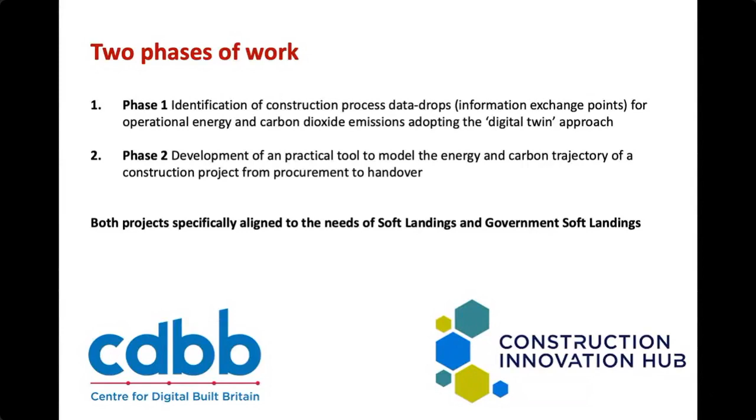We're not here to talk about phase 2, but if I get a chance at the end of this talk, I will do so. The point of this particular project is to align to the needs of soft landings generically and the central government client version, government soft landings.

I can't assume everyone listening is fully aware of what soft landings is, but there are two sentences which largely encapsulate it. I'm not going to read them out, you can read them as quickly as I can. The overall purpose is to improve the operational outcome of the building, not the construction process or the construction project team, the building, the asset.

We must remember that's what it's about. It's not about construction efficiency, design quality, or cost effectiveness and timeliness. All those things are really important, but it's about whether the building performs as intended in energy terms, in comfort terms, usability and manageability terms.

So there is what we call the soft landings virtuous circle, and this is the opposite to the business as usual vicious circle that construction gets itself into. There are now six stages to soft landings. We separated design and construction a few years ago, and that was a damn good thing that happened.

The one bit that's missing from this circle is feedback to the next project. We have to learn from experience. The whole point of soft landings is closing the loop between client expectations, design intentions, and the operational outcomes, and learning from the experience.

I might argue, and I'm sure I'll offend a few people here, that the UK construction industry is one of the very few, if not the only, major industry that persistently operates in an open feedback loop. It almost tries not to learn from experience. Some would even claim the industry's insurers drive this culture in order to reduce risk.

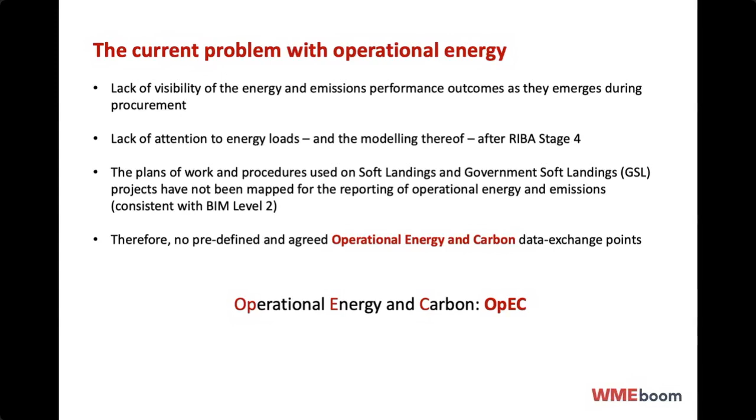Now, this diagram usefully appears both in TM61 and the RIBA Plan for Use, and what it demonstrates is that we regularly overpromise. We go below the regulatory or client target line there on the performance factor scale on the left-hand side. We often try and beat that, but when we switch the building on, we discover it's actually an energy performance gap of anywhere between 2 and 3 and sometimes more.

And there are reasons why that is. And there are no soft landings activities. So if you do actually recalibrate the model in year 1 of building operation, you're likely to find this disparity. We call this the performance gap.

It's well documented, although I will give you a demonstration of it here. This is an academy building. Doesn't matter which county it is, they're all the same.

As you can see, the as-built EPC for regulated loads only was beating the target emissions rate. The scale on the left-hand side is TER in kilograms of CO2 per square metre per year. There was no as-built EPC for unregulated loads in this particular project, but it hardly matters - you switch the building on and you end up with this massive overshoot on energy.

And that's where this S curve comes from. It's a stylized curve, but we see it time and time again on building studies.

And of course, none of this is covered by statute. You've got your planning permission, you've got your EPC. It doesn't really matter what the building does after completion. You're not going to be held to book for it.

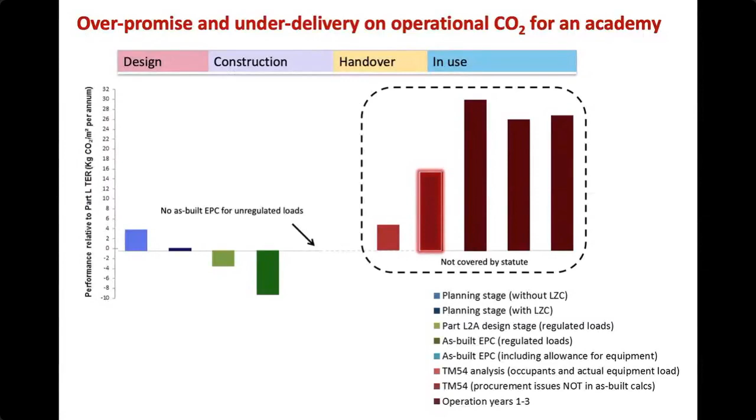Now, you can run a number of buildings through this and you'll get a similar kind of shape. Sometimes buildings do better, but often they're like this. So coming back to this diagram, the issue we have is that we don't know what's going on in the middle here because no one's keeping track of it.

Now, there is a design for performance initiative which demands that we keep track of it. And of course, Passive House, the certified Passive House process also demands that you do it.

But for the vast majority of projects, we do not have eyeballs on the consequences of things like value engineering or vandal engineering. We don't have visibility of what happens with what's known as equal or approved specification changes and so forth.

The other important thing to bear in mind is that simulation modelers are not interested in unregulated loads and know very little about building performance. Their focus is on BRUKL reports and not much more.

So there is no audit trail being taken by expert modelers who may actually be able to tune up the dynamic simulation model. They're very rarely involved. So there's a lack of attention, lack of fee to do things properly.

We don't sustain the skills needed to maintain energy and emissions during procurement. And as I said earlier, we have this construction culture and a reward structure that focuses on project delivery at the expense of long-term performance.

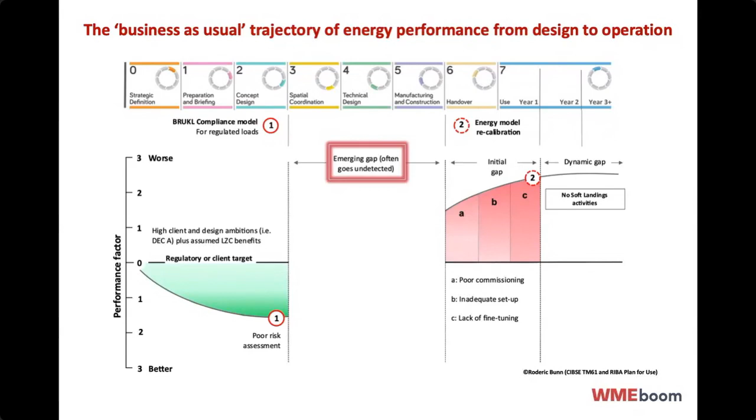This diagram is also in CIBSE TM61 and RIBA Plan for Use, and it shows a dotted line of a better approach where you're keeping track of the energy and emissions as you're going through the RIBA plan from stage 0 to stage 7, which now includes the soft landings process, the soft landings activities in the RIBA Plan for Use. There's still likely to be a rise in loads and operating hours, product substitution and so forth. But at least if you're keeping track of it, you can watch it, you can see what's happening, and you can report it. The project team can either accept the penalty or put in place some mitigation to reduce the impact, the negative impact of whatever is causing the energy uplift.

And of course, if you're doing soft landings activities later in the project, then you've got a chance to tune up the building, and you've got the error bars there, which are consistent with the TM54 approach. So yes, if you're lucky, you might get nearer to the design estimation, but most of the time you're going to be overshooting it a bit, but you're not going to be business as usual. You're going to be following the passive house design for performance mentality and doing something to tune the building up and to keep watch on the emerging loads, on the loads as they emerge.

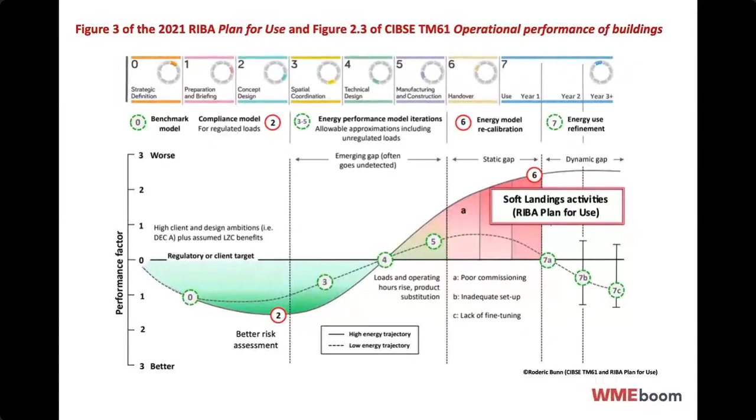So the big question is, when should these reporting points be? Where should they be? How do they match onto our existing plans of work? So what data needs to be exchanged and when?

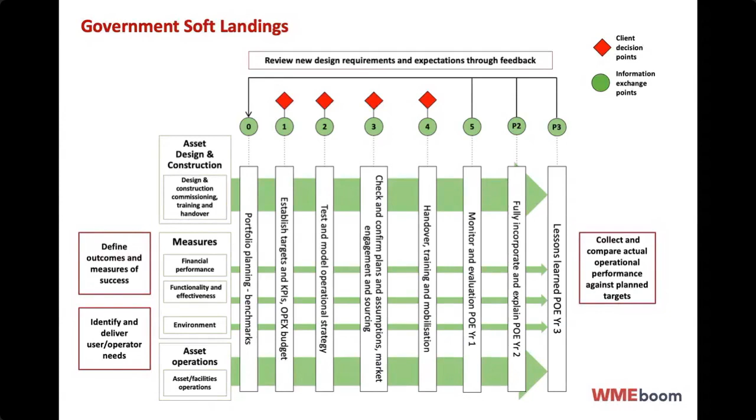Key question. Now, we've got a bit of a head start, because with government soft landings, this is a diagram you often see in government soft landings documentation. It's not the most elegant diagram that's ever been drawn, but it does actually have 7 - oh no, it's 8 reporting points. It doesn't say when they are, but it does identify 8 information exchange points. So the trick is, are these 8 enough? Are they equidistant from each other, or do they fit in some gateway process?

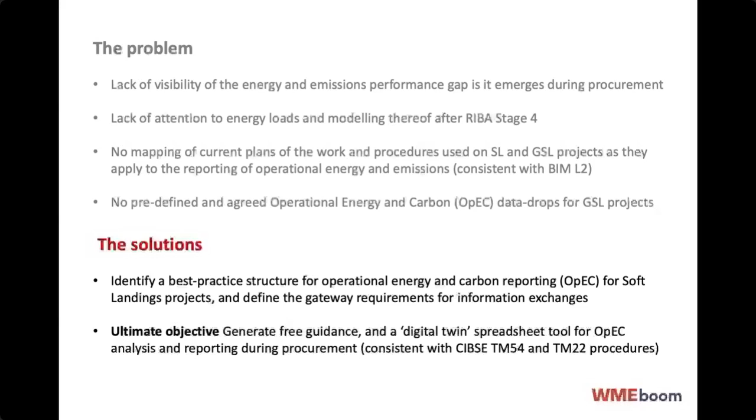So that's the problem. The solution we came up with is to come up with a best practice structure for these data drops, information exchanges, but moreover, to define the gateway requirements for information exchanges. And that's where it starts to get a bit tricky. Ultimately, generate some free guidance and also generate a spreadsheet tool for this procedure that could be used. That spreadsheet tool would be consistent with the procedures published by CIBSE, notably TM54 and TM22. We'll come on to those two documents later.

So what I did was assess the main plans of work and the procedures that most construction projects use, particularly those that are relevant to central government projects, NHS projects that use government soft landings, and in Scotland, documents like the Scottish Capital Investment Manual and so forth. Then the next trick was to identify the references to energy emissions reporting during procurement and post-handover soft landings aftercare requirements.

Plotted the main measurement reporting requirements, identified the data drops specific to Scotland requirements, talked to simulation modelers about what needs to be reported and when, and liaised with institutions like RIBA to make sure it fitted with their requirements. We then wrote some assessment flowcharts, which I'll show you shortly. So those are the kind of four things we'll go through.

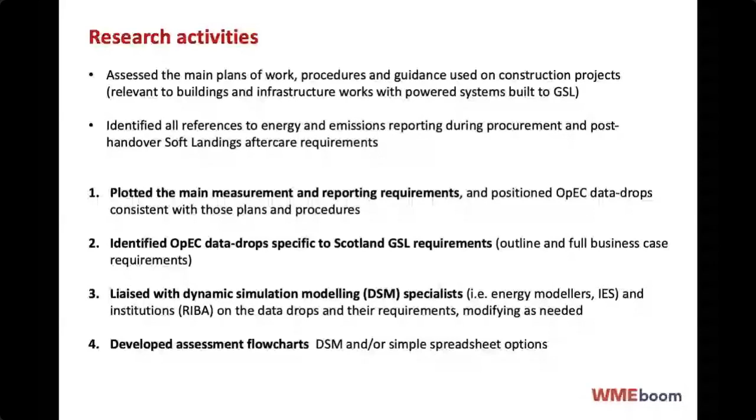Here's an arguable objective, or rather consequence of what we did. You either go down the dynamic simulation route, and of course companies like TAS and IES would say that's the best route to go, or you go down a spreadsheet route, or you try and do them both in parallel. Now, of course, doing things in parallel is not the most efficient or elegant way, but we have to recognize that the vast majority of projects do not have the fee and the capacity and the resources to maintain a dynamic simulation model all the way through.

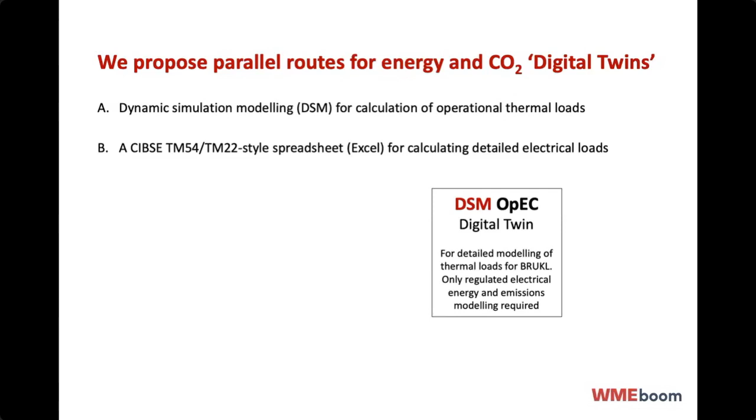And actually a spreadsheet, an Excel TM22 style spreadsheet, is probably the simplest and best way of keeping track of all the electrical loads, because it's mostly the electrical loads that increase. So on the one hand, you have a dynamic simulation model, digital twin, and you would use this for modeling of thermal loads for BRUKL outputs, but mostly, certainly up to RIBA stage 4, you're only looking at regulated electrical energy and emissions. Over here on the left-hand side, you can use an Excel spreadsheet for detailed analysis of all the electrical loads and import the thermal energy and emissions data from your BRUKL DSM if that's what you need to do. The big question is, are you going to keep the DSM running or are you going to shelve it?

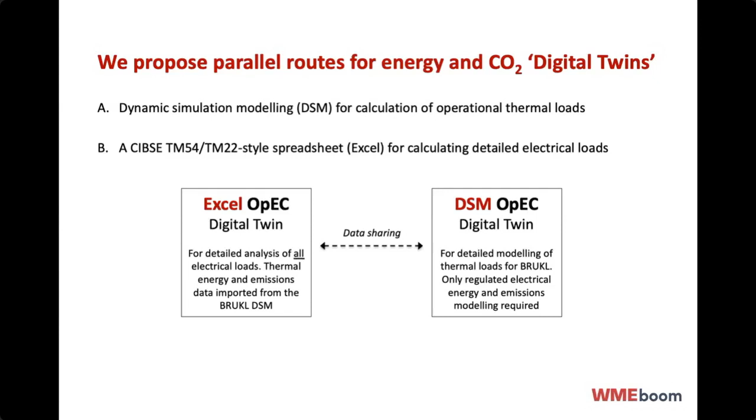There are many reasons why energy calculations aren't done in DSM, and here they all are on this slide, which Fiona will make available as a PDF after this presentation. I'm not going to go through them all - this is one you can read in your own time.

But I've highlighted one: you have to ask whether the DSM modelers working in consultancy are skilled enough on operational performance factors - diversities, load profiles, wasteful and parasitic operation - to model the emerging energy performance of a building accurately. And they're not asked to calculate those things anyway.

Another point, third from the bottom: the more things you try to model in a DSM, and the greater detail you put in, the more margins of error on things like power densities and performance coefficients start to build up. The more they compound, the less accurate the prediction becomes as assumptions pile up - an arguable point, we can discuss this in Q&A later. Anyway, there's a number of reasons why.

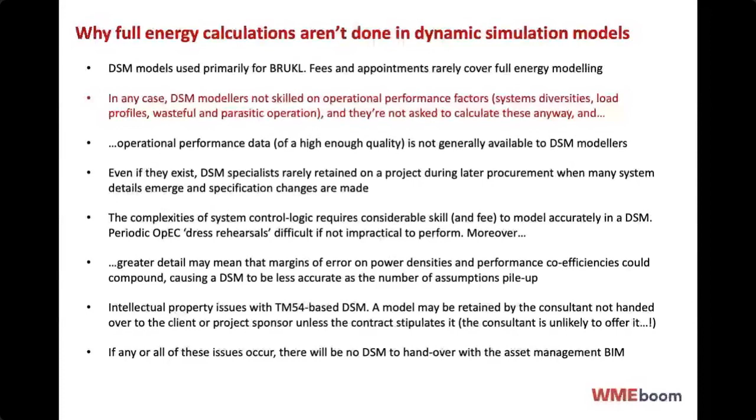Alex Tate, head of technical practice at RIBA, came up with a wonderful quote when we were discussing this: 'We need to incentivize the need to have the right kind of geek on board.' Whether Alex is happy for me to say that, I don't know, but it was a very good quote, and he's absolutely right. Passive House does that, and Design for Performance will too, but until those procedures are commonplace, you don't have the right kind of geek on board.

So I looked at a number of key project plans and plans for use, and there they all are. I may have missed one, I hope I didn't, but there's the plan for use, the BIM framework, BREEAM, government soft landings, BSRIA soft landings, BSRIA BG6 design framework for building services - a very granular approach - and the requirements of various CIBSE technical memorandums.

There are 5 types of energy and carbon data drops. I'm showing you this slide now so the one that follows makes sense. Anything mandatory is in red - that's essentially BRUKL and as-built EPC. Really simple, there's only 2 of them generally.

The intermediate ones I've colored green, and they're the ones that link to gateways in RIBA, the BIM framework, design framework for building services, and so on. So it really links to this diagram in the RIBA Plan for Use and CIBSE TM61 - those are the green circles.

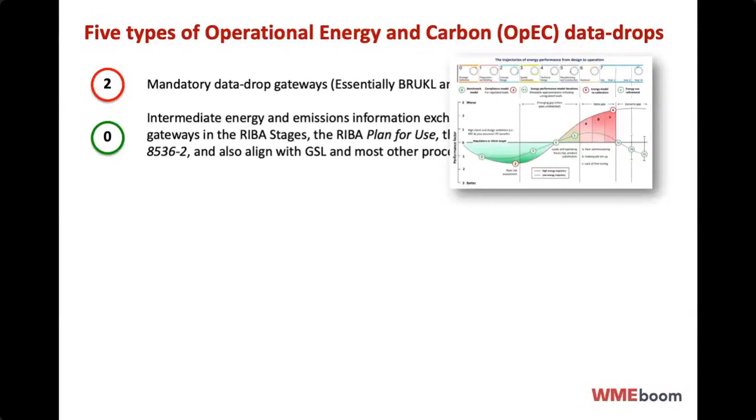Then you've got the specific requirements of the Scottish Capital Investment Manual and NHS Scotland, which are required to do business cases, and as part of that look at the energy and carbon emissions outcomes of those buildings. There are information exchange gateways laid down, and just so you know, both SCIM and NHS Scotland mandate government soft landings, so there's no way out of that.

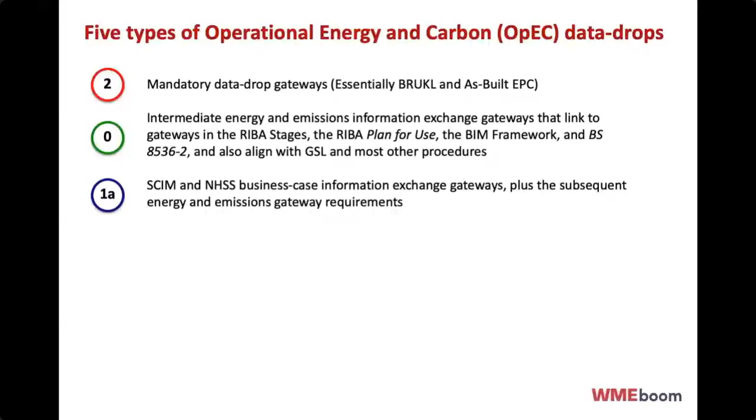Then there's these dotted circles, which I showed earlier but didn't explain - these are pre-gateway information exchange points, for projects where you have extended time and might want intermediate data drops. So they are 3N and 4N essentially, occurring prior to the gateway, and you might want to do multiple of those.

Any red dot is an intermediate data drop within government soft landings, because government soft landings has not separated design and construction in the same way the BSRIA soft landings documentation more recently has. It's also worth saying not all projects using government soft landings use the RIBA Plan of Work. There are many highways or drainage scheme projects that are government soft landings compliant but wouldn't go anywhere near the RIBA Plan of Work.

And then you have BSRIA's Pitstopping reality-checking process. I mention this because, much to my surprise, it's mandated by the Scottish Capital Investment Manual, and it's also mandated for NHS Scotland projects. I'd like to know who decided that. I haven't spoken to them yet, but making it mandatory wasn't what was intended when it was written. But anyway, let's not go down that rabbit hole.

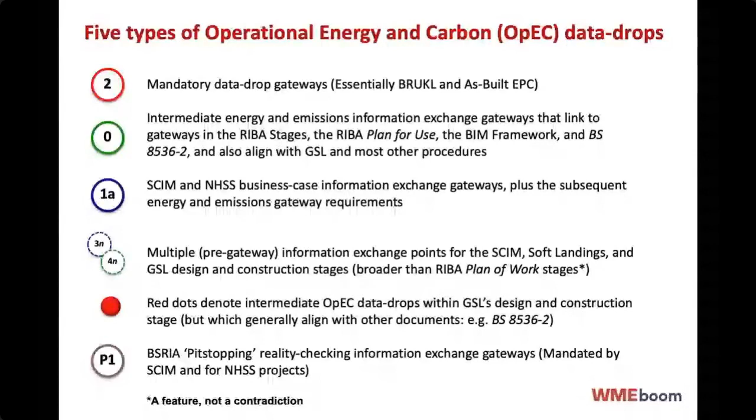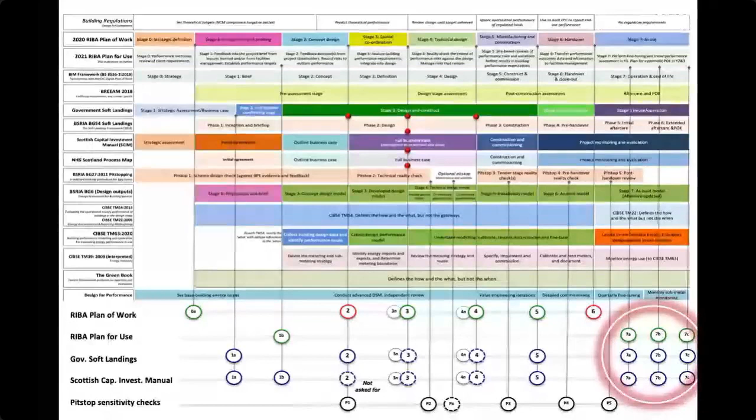So that's good news, right? The data drops broadly line up. There's nothing inconsistent, nothing that is clashing. And that was good to know.

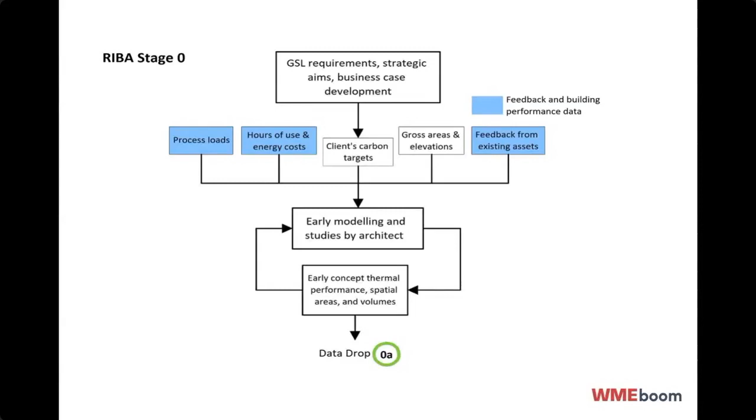When it comes to the spreadsheets and the guidance that's going to underpin this, we drew a number of flowcharts that say this is what's required at any one moment in time. And the guidance is going to contain these flowcharts. Now, in this presentation, I am not going to go through every flowchart in great detail.

But you can kind of see in this particular one, RIBA Stage 0, there may be, if you're working on a phased program of work, or working with a client you work with regularly, it may well be that even at stage 0 there may be some early modeling and studies done by the architect. And that early modeling and studies may actually take into account the client's overall carbon targets.

And in doing that, you're informing the client's strategic aims and business case development, which brings us back to the Scottish Capital Investment Manual and its requirements. So for many projects you wouldn't be doing this. There wouldn't necessarily be an appointment at RIBA Stage 0 that would involve this, but on certain projects it would, and it would lead to early concept thermal performance, spatial areas, and volumes.

Now, the reason I show this flowchart is actually for the blue boxes, because what you need to be doing is identify: are there any process loads? What are the hours of use and the energy costs likely to be incurred? And what feedback from existing assets do you have that might inform how this building might be required to be designed for that particular client?

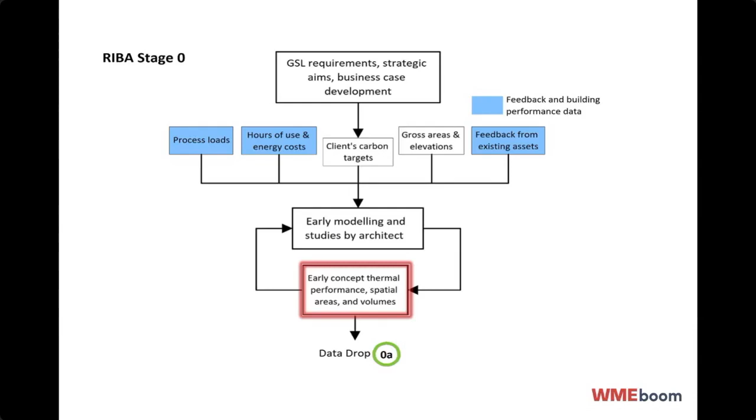So these flowcharts are giving you clues about what should be put into the digital twin when you create it. Now, when it comes to Government Soft Landings and the Scottish Capital Investment Manual specifically, this is the business planning side of things.

You need that data drop 1A for the orange boxes on the left-hand side, and that goes into the outline business case, which then feeds into the full business case later on. That's the GSL-based client requirements. So you've got this notional digital thread of items from the client that would go into the building information model. It may be that your feedback from existing assets needs to go into a separate data drop.

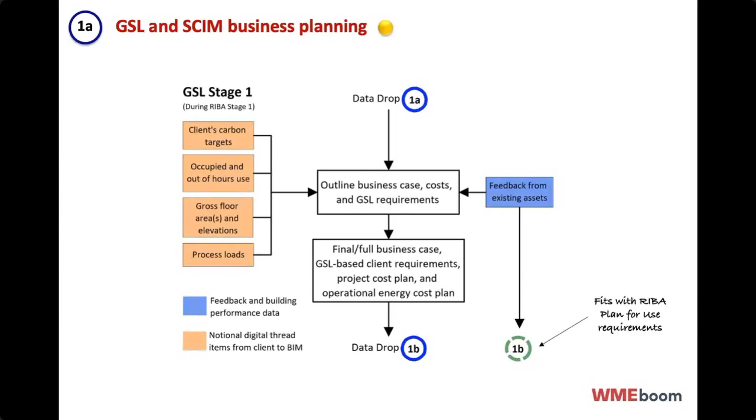And that, for those of you aware of the RIBA Plan for Use, that data drop fits with the RIBA Plan for Use requirements, as I showed you earlier. So I've tried to make these flowcharts consistent with existing guidance and requirements.

Now, as I say, I'm not going to go through these flowcharts in great detail. You'll have them in the PDF. They will also be in the printed guidance with all the words that attach to them. But it does get complicated, because if you're going to have a parallel digital twin, the electrical side in a spreadsheet, and the dynamic simulation model doing the detailed thermal.

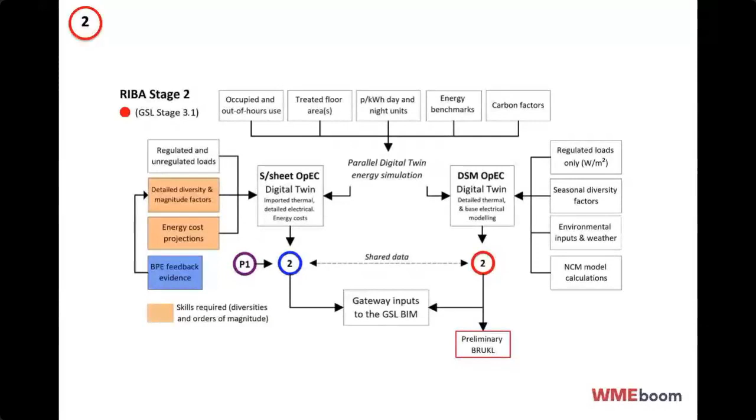Although there's going to be detailed electrical on the left-hand side, and BRUKL and thermal inputs on the right-hand side, and along the top, the main or universal inputs that go into both.

But on the right-hand side, if you're doing BRUKL in RIBA Stage 2, then you're really looking at NCM model calculations. You're looking at environmental inputs and weather. On the left-hand side, on the electrical side, you're looking at detailed diversity and magnitude factors, and the BPE evidence would go into that.

I very much doubt that simulation modelers working in a DSM on the right-hand side, who are focusing on the BRUKL report, will be handling BPE feedback evidence and being able to do those diversity and magnitude factor calculations. I'm sure there are people at IES and TAS would disagree with me, and there's probably some simulation modelers out there that would disagree with me too. But in general terms on projects, this is the reality.

You're doing two things separately in parallel. Either way, they output to data drops, and either way, they output to inputs to the building information model, particularly if we're working on a government soft landings project. And of course, you're generating a preliminary BRUKL.

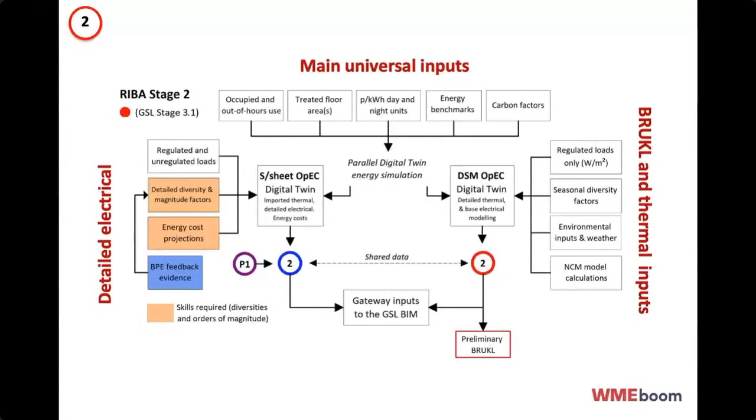When you get to RIBA Stage 4, again, the boxes are very similar, but obviously on the right-hand side at RIBA Stage 4, you're looking at seasonal thermal diversities and climate change adaptation. If there are any changes to the DSM after you've generated a BRUKL, or up until that point, you're looking at more detailed weather files, maybe, or an updated weather file.

But the critical sensitivity analysis on the loads, which are the red boxes, this is the sensitivity analysis that often doesn't get done, particularly on operating hours and control and management factors. There may be people listening to this presentation say, oh yes, well, we do that. Do you really, all the way through? I very much doubt it.

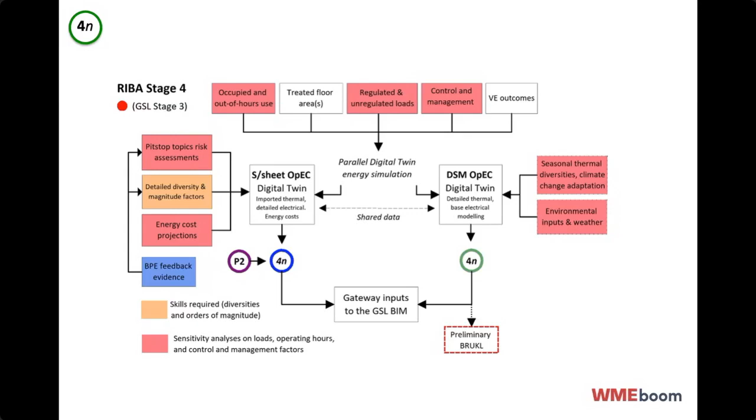You have to go looking for data on changes to occupied and out of hours use. You have to go looking for information about unregulated loads, and you have to really assess the difference in changes in control and management if the contractor has decided to go with a different control supplier, for example.

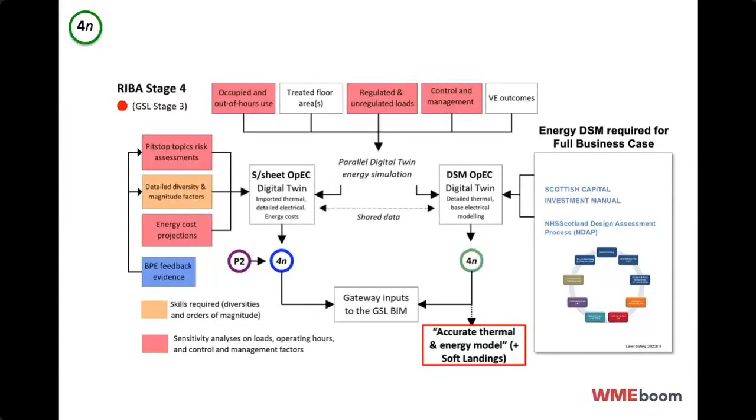Now, the Scottish Capital Investment Manual actually calls for an energy dynamic simulation model for the full business case, asking for that up until RIBA Stage 4. So it's worth bearing that in mind. And to quote the Scottish Capital Investment Manual, they are asking for, and I quote, accurate thermal and energy model, and soft landings. What is accurate in this context demands debate, because as we know, all estimations come with margins of error. Accuracy is a moving target in itself.

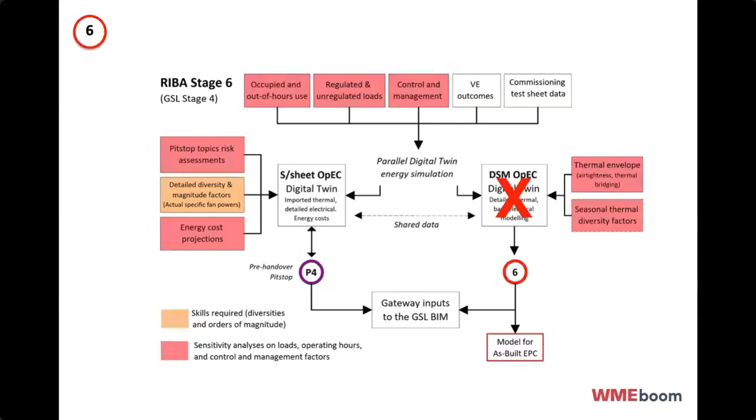So when you get to RIBA Stage 6, here's a big question. Are you running the digital twin, the dynamic simulation digital twin, or has it disappeared? If it's disappeared and it's no longer being run, then you're focusing on the digital twin that you've created in the spreadsheet, which will have imported the last known thermal calculations in the DSM.

And of course, you won't be able to import the thermal envelope calculations and any seasonal thermal diversity factors. That will just go straight into the as-built EPC. It won't go via the DSM.

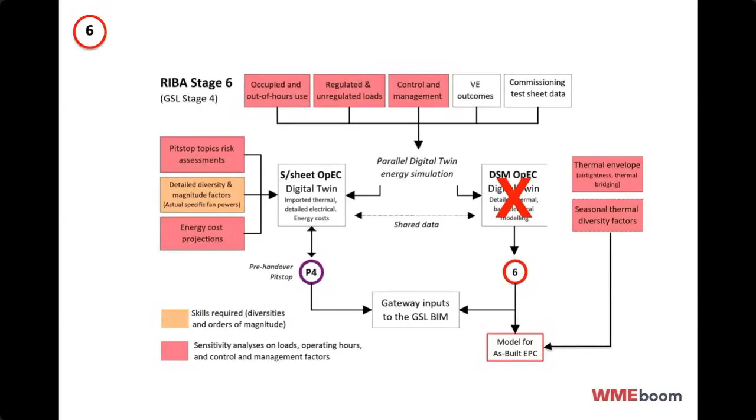Similarly, any commissioning test data has nowhere to go except into any analysis being done outside of a DSM, in some kind of spreadsheet, because you still need to keep track of your diversity and magnitude factors, particularly for things like actual specific fan powers, not what was assumed at design.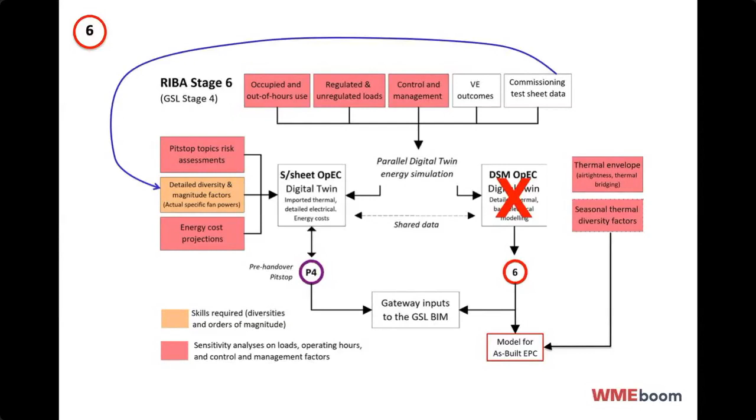A lot of skill is required on the left-hand side of this diagram. A lot of skill, and I question whether that skill exists to the degree it needs to if we're ever going to meet our net zero carbon targets.

At RIBA Stage 7, you may well have a DSM. If you do have a DSM, then that's fine. That will be the final model for the building information model, or it might even export to an Excel digital twin. If you've got your Excel running, then you're still revisiting your diversity and magnitude factors.

But also in RIBA Stage 7, which is the first stage of building operation, that's when the soft landings team will be gathering data during the defects period to keep a watch on the energy costs, and must be observing the initial control and management practices occurring in the building, because this is the early assessment on the actual loads, operating hours, and control factors operating in the building.

And you may have a post-handover review pit stop before you hand over to the asset managers, who, if they're going to be managing the BIM, will then take that on, or take on the spreadsheet that you've created.

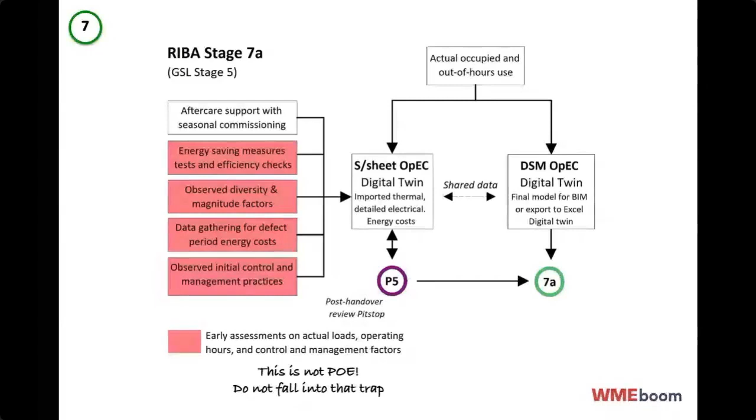Just one word of warning: doing early assessments in the first period of soft landings is not post-occupancy evaluation. It's data gathering and using your eyeballs to see what's going on. Do not fall into the trap of judging a building during defects. That's madness, I would say.

So RIBA Stage 7, this is in the second and third years. One assumes there is now just one digital twin, whether it's a DSM or whether it's a spreadsheet, hardly matters. And the soft landings aftercare team in the red boxes are now tracking that. They're also tracking the effects of seasonal commissioning and any annual formal post-occupancy evaluation that's carried out.

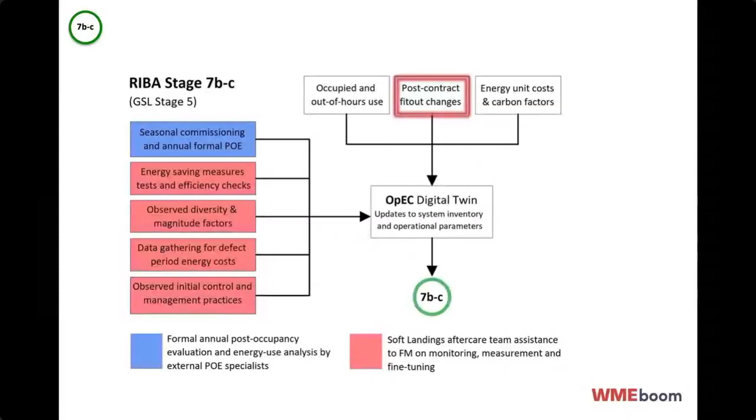So I have taken through those flowcharts in great detail, and I've just highlighted there. You've got to bear in mind, of course, post-contract fit-out changes, which can change things. Server rooms, for example, they can add electrical loads without you knowing. So I have raced you through those flowcharts, but the guidance that will be published will take all that into account.

So what energy analysis and reporting methods have we already got? Well, we've got CIBSE TM54, but that's not a tool, remember. That's a set of procedures published by the institution, and consultancies, designers, they develop their own bespoke spreadsheets and formulas. And those outputs aren't necessarily transferable to third parties or the building operators.

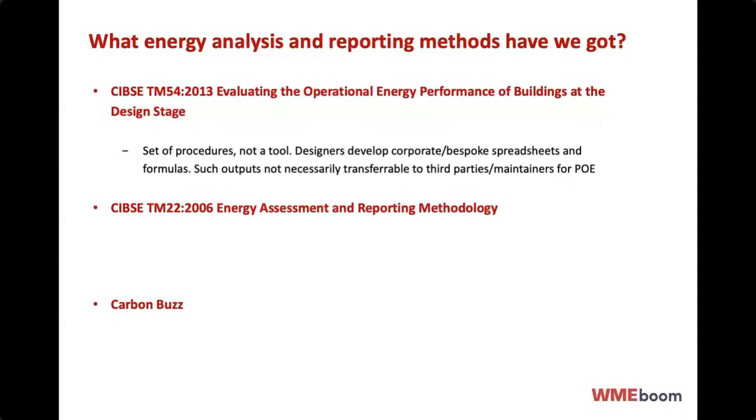They may be commercially confidential to whatever consultancies created them. Now, if consultancies do hand over their TM54 calculations or their spreadsheet, then fine. But I would suggest that many of them do not, because they're corporate and bespoke.

We have CIBSE TM22. The 1999 version is pretty basic, but it's functional. I have to say, in my experience and the experience of the person that authored it, the 2006 version remains rather buggy. It's certainly outmoded. It's still published. I personally can't recommend it.

That's another story. And of course, people say we have, there is a 2014 version that's unpublished for Innovate UK, but CIBSE never adopted it. Well, rightly or wrongly, that's the fact of the matter.

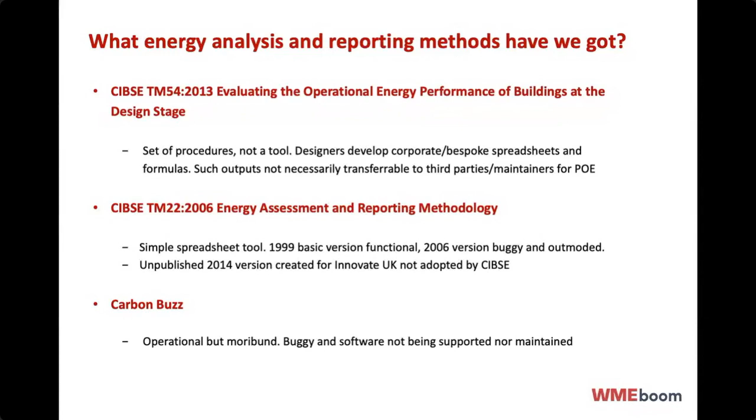We do have Carbon Buzz. I don't know if any of you know, it may well be operational as a website, but the software is totally moribund. As far as I know, it's not being supported nor maintained, and that's been the case for the last 5 years, unless a delegate listening into this presentation can tell me otherwise.

So what we have done in order to help these energy and carbon data drops, we've developed a free downloadable TM22-style spreadsheet, which is designed to track electrical energy and emissions during design, construction and POE. Just like TM22, it's a single line entry.

You've got to import the thermal loads from DSM, and this spreadsheet will generate kilowatt hours per square meter, the cost of energy, and emissions of CO2. The beauty of this spreadsheet is that it's been written with macros that enable you to maintain an audit trail of any changes that you make using just one spreadsheet.

That's with optioneering, spec changes, value engineering, changes to hours of use, and so forth. So you've got an audit trail that enables you to capture those emission savings or penalties as they emerge. It has an energy metering sub-metering module. It's just a nice to have.

And the important thing here is that this spreadsheet has been made GSL and Scottish Capital Investment Manual compliant. In other words, it will deliver accurate energy and thermal modelling. The spreadsheet was drawn up by John Field, who authored the original TM22, and I added a bit of input and top and tailed it for this purpose.

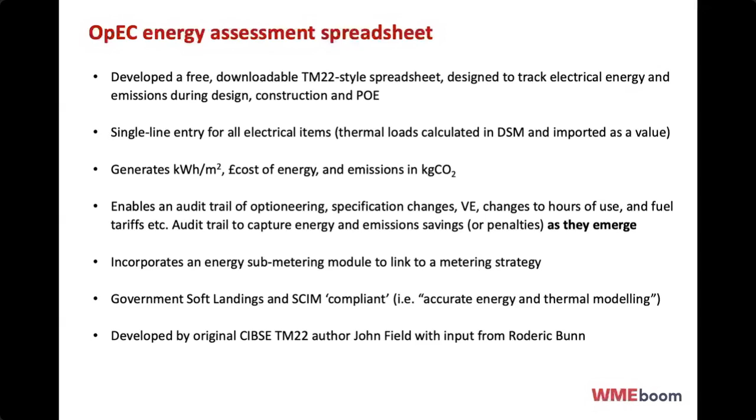So good old John. Now, presenting you with how to use a spreadsheet that you've never seen before is a rather pointless exercise, but just a couple of slides to show you broadly what it can do. You enter data into the red boxes. It's pretty straightforward - floor areas, tariffs, hours of use, and so forth.

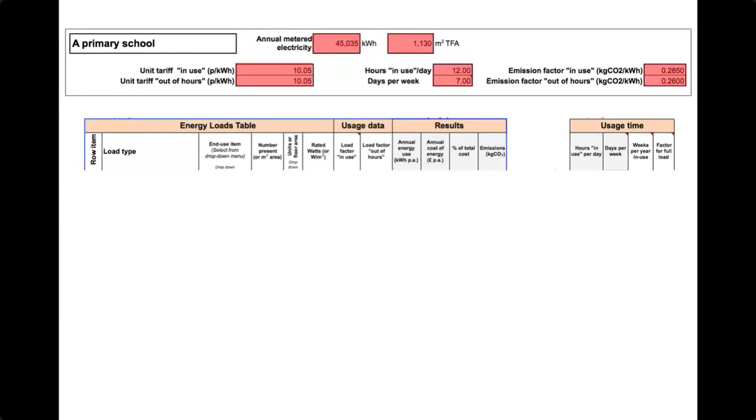You then have an energy loads table, which is a single line entry, which I'll show you in a second. That outputs secondary results of power demand, total watts at full load, in use winter and summer, average power demand, and so on. It calculates those things automatically.

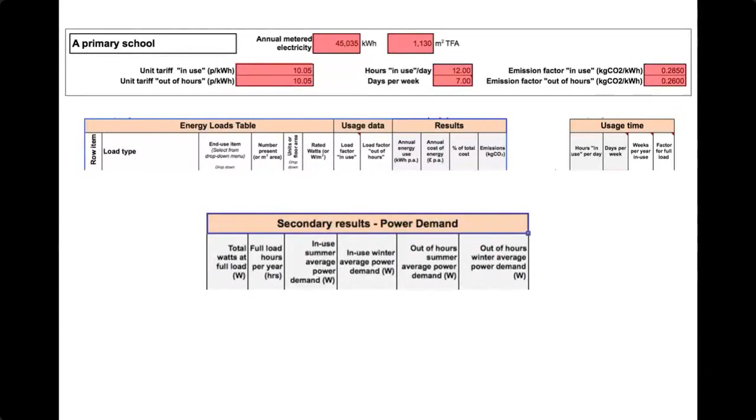And you've got toggle buttons in this spreadsheet which enable you to make a change and capture the change. When you do, it looks a bit like this. This is a blank sheet. So there you are, single line entry, really easy. You put your load in, you select the item from the drop-down menu, how many bits of equipment you've got, is it rated watts, is it watts per square meter, and it calculates.

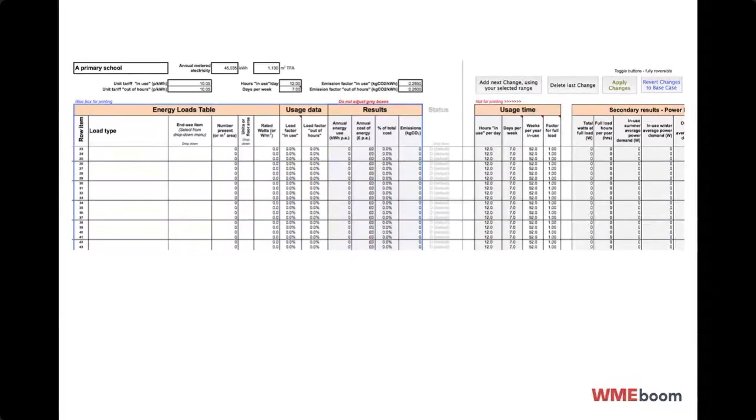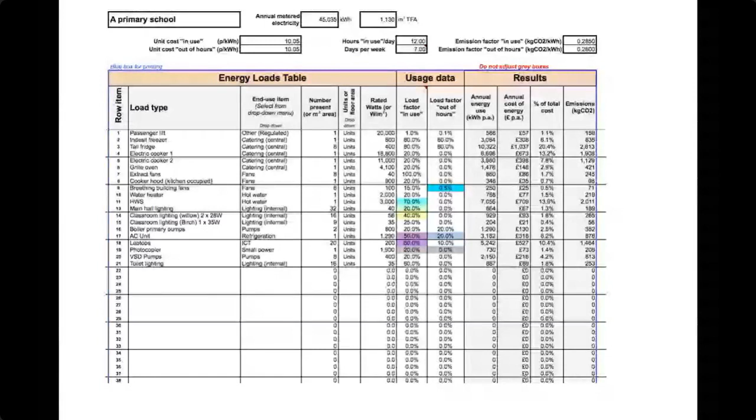And here's the beauty - once you've started making changes, it captures them. So here's a mock-up of that. Changes have been made to half a dozen loads there, and the spreadsheet will automatically highlight the change that you've made and put a color code to it. So it captures it in the spreadsheet.

You can batch it. You can do a whole batch there in green, and you can say, I'm going to change the load factor out of hours for a whole load of lighting systems. As I say, it captures it.

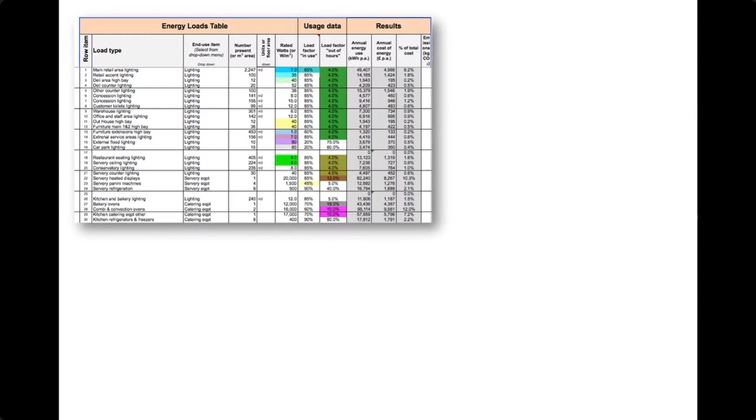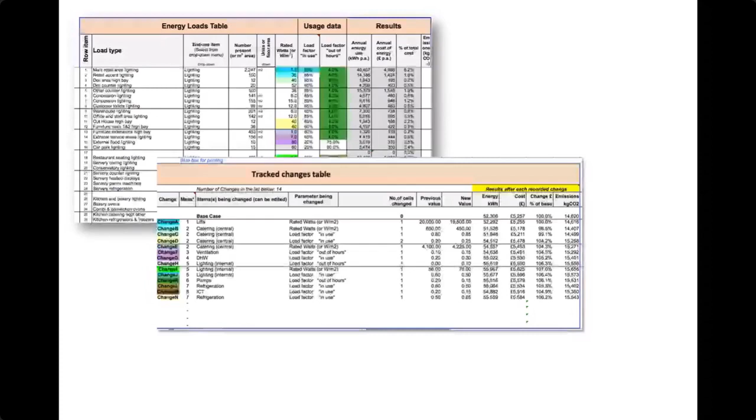And the great thing is it's got this track changes table in it. So every change you make, it will itemize it and say, change A, you changed this - this is the saving or the penalty in CO2 and cost. And it goes through and it captures it.

And it then also will give you an output table, a summary output table of those changes. You can associate it by submeter if you wish - it's not mandatory, but you can do that. Which then gives you a submeter table, and you can start to keep track of what the submeters should be recording when the building is switched on.

So that is a bit of a gallop through a spreadsheet that you've never seen. But the beauty about this spreadsheet is no matter how many changes you make, the spreadsheet never gets any bigger than a megabyte, which is ideal for when you're doing analysis and calculations on the hoof, or you want to hand over a fully finished spreadsheet to an asset manager to take it on from that point on.

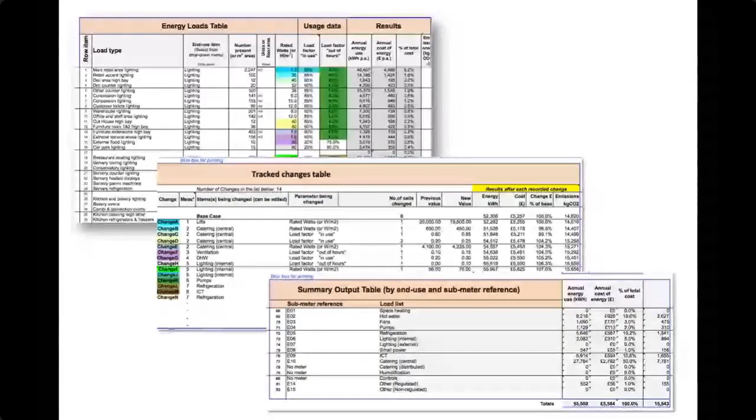You're not talking about gigabytes of data in a dynamic simulation model. You're talking about less than 1 megabyte. So it's a bit like TM22 on steroids. That's the way I'd look at it.

So this explanatory guidance is going to be generated. We're going out for a bit of peer review, and that is occurring at the moment. So we're very close to publication on this material. We'll generate some explanatory guidance and flowcharts for each information stage gateway to explain what information is required at each stage, and I've shown you those flowcharts already.

We will make an open source TM22 style operational energy and emissions tracking spreadsheet available, and we'll generate some user guidance for that spreadsheet. The guidance will be published by Centre for Digital Built Britain and Construction Innovation Hub. I'm hoping there'll be some awareness raising, training and support webinars, that kind of thing.

At the moment, we will be dovetailing this work with the current revision of BS 8536, which hopefully will reference the RIBA Plan for Use as well. I haven't got time to get into the phase 2 project - that's for another time. But just for the record, we are going to develop a trajectory-based visualization of operational energy and carbon factors.

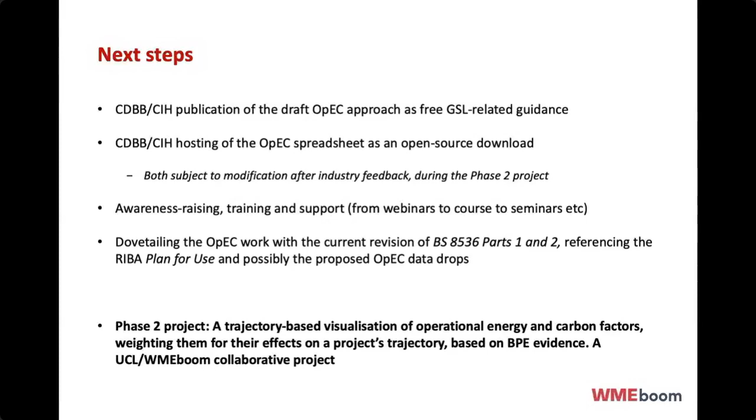So I managed to fit it in within 50 minutes. I hope I've kept delegates listening to me all the way through. Sorry if it's a bit of a gallop. I'm happy to take questions from this point on. Fiona.

Okay, thank you, Rod, for that. That's a lot of information there and a lot of stuff to take on board. Yeah, and a lot of stuff. I'm fortunate enough to have been sent the presentation, so I think a couple of people have said it's difficult to see - once you get the presentation, you're better to see all the detail. There's a lot of information there. There is, I wrote it. I wrote it so people could see the PDF and use it afterwards. Sorry. Yeah, so you can read it and digest it.

So the question that's come through, which I'm going to read first, is from Steve Rufus in Dorset, and he's asked: has the use of government soft landings methodology helped to reduce the performance gap?